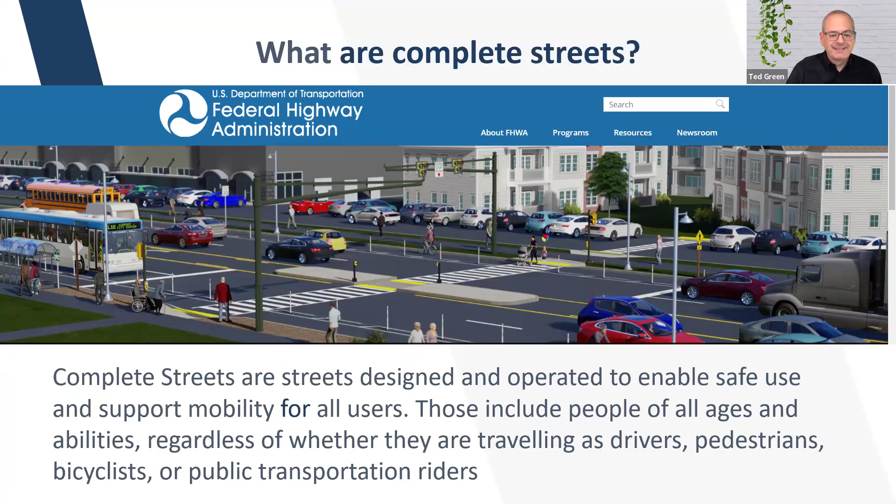Heavy traffic though. So what do we always hear about when it comes to complete streets or even about having pedestrian networks as a whole? Well, the biggest thing we have is: we have no pedestrians. Well, that may not always be the case, but if you have a situation like this where you see these little pathways along the side of the road, you may not always see pedestrians, but that pathway gives a clear indication you do have pedestrians.

So people say we don't need sidewalks because nobody walks here, but this gives an indication that you do have a need for pedestrian networks and even possibly bicycle networks. Probably, if you have pedestrians, and especially over long distances, you can also have bicyclists as well.

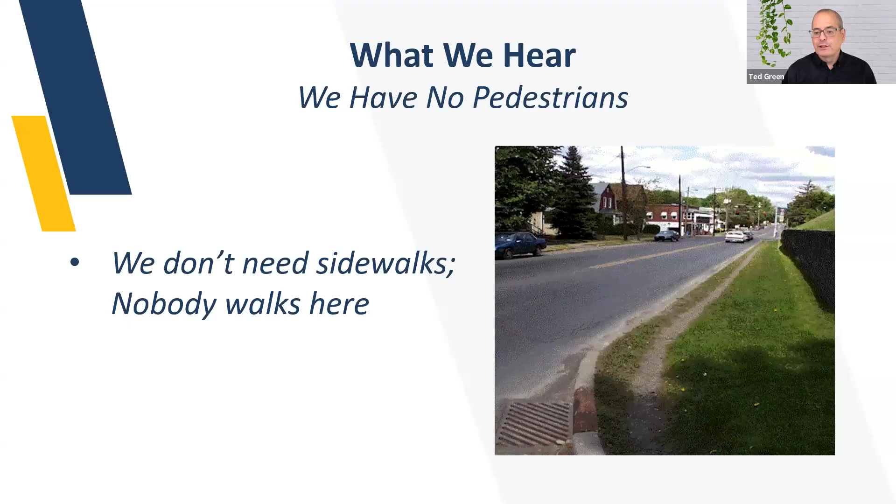The other thing we hear is this: I would walk here if there were sidewalks. Ever been in that type of situation? There are some roads where you really don't need sidewalks. I grew up on one of those streets. I mean, there was not enough traffic. It was low speed. We actually played in the street, no problem. We also knew to get out of the street if a car came.

But that always becomes a thing. Some people would walk if they can do it. And I've definitely seen places where people are walking and it's kind of frightening that they are walking, but it's the only way they can get groceries. And even a long walk that they have to do when they have to go shopping or some other place. There are just people who don't have a driver's license, don't have the ability to drive anymore.

Lots of different reasons. Can't afford a car. Cars are expensive to have, not just to buy, but you have to insure them. You also have to pay for maintenance.

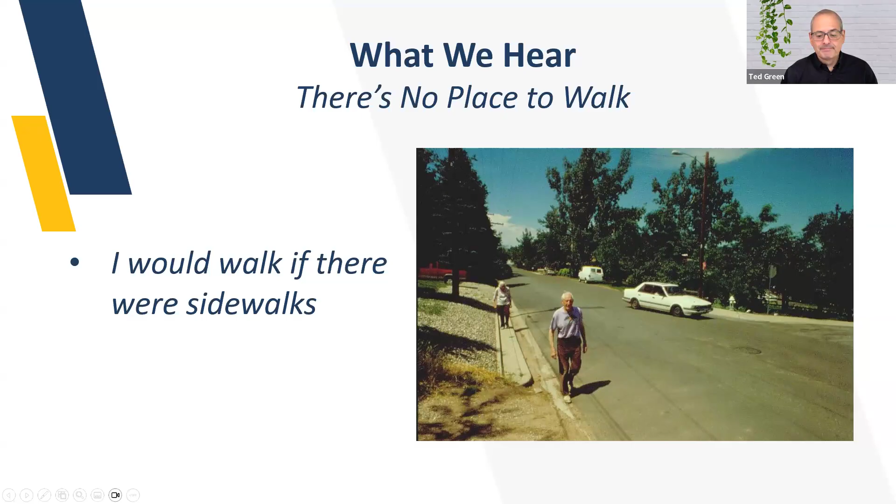So here's a question. I don't have the chat box, so I can't use this one. But just think for a moment, and I'll bring up the answers that always pop up. They can put them in the Q&A if you want. Okay, if you put it in the Q&A, it's perfect. Just put the first thing that pops into your mind when you hear the word disability. You place that as a question.

There is slightly more variety than usual, but the big thing that pops up is wheelchair or curb ramps, since they're intertwined together. And that is a big thing when you say the word disability. Most people, especially engineers, that's how I can tell who the engineers are, say wheelchair, because that's what we see the most often. We see a lot of people with wheelchairs. We put a lot of emphasis on creating curb ramps for people in wheelchairs.

But it's far more than just people in wheelchairs that have a need for accessibility. Can't do something. That's an interesting one. But mobility as a whole becomes a big issue. Most people, like I say, think of wheelchairs, but wheelchairs aren't the biggest group of people out there. Somebody just put blind. That's actually a good one.

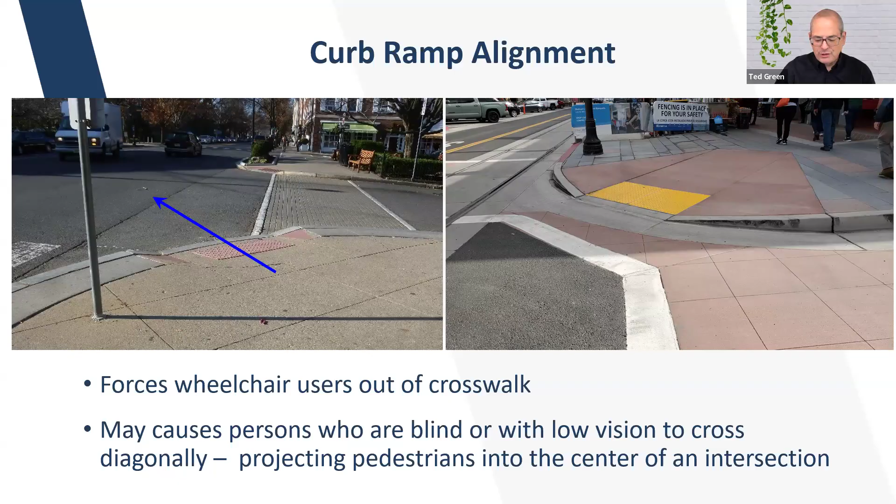Alignment. So this is what we like to have: a nice straight alignment. You can see in the photo on the left, straight across on both of those particular crosswalks into their crossings. So we see that other diagram. We have good separation. That's a complete streets type diagram. We have good separation of everybody. We have travel lanes.

We have curb extensions, or some people call them bulb outs, which actually give you shorter crossings for pedestrians by bumping it out. It also keeps parked cars away from the crosswalks, which helps with visibility, and you don't have anybody parking in your crosswalk. So a lot of good advantages to that. And we see bus stops. Nice, good setup, and all the curb ramps line up with the crosswalks.

So you see how it's all set up with that one diagram. You see the one crosswalk in yellow. You see that at the bottom there's what's called a clear space. It's actually fully in the crosswalk. So it's just a nice setup when you see items like this. And there are no conflicts between the pedestrians and motor vehicles going in the same direction.

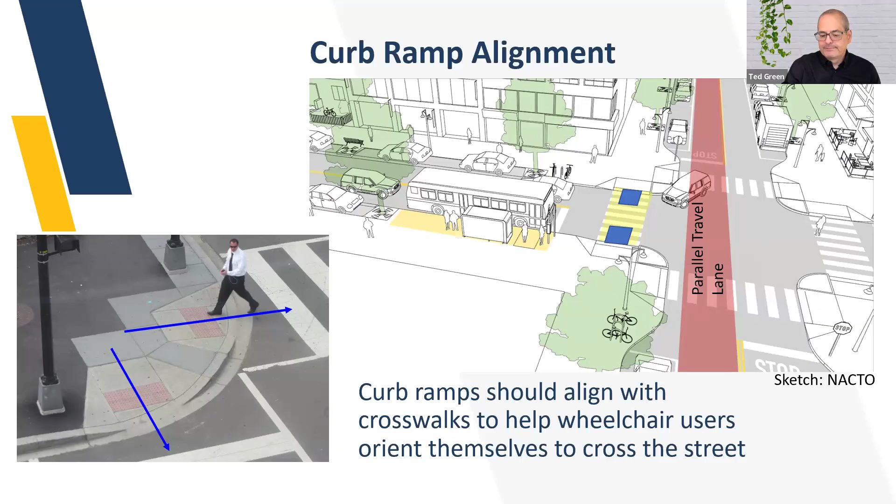Decorative crosswalks. This has definitely been in the news lately. It's also in the Manual on Uniform Traffic Control Devices. A lot of people aren't aware of that. If you have a marked crosswalk, the two white lines are the minimum. So anything between those is part of the actual traffic control device itself. Specifically, we're talking about the traffic control device of a marked crosswalk.

Now, a lot of times people use this for beautification. There can be some issues with this. The biggest issue is with pedestrians who have low vision. People with low vision have very blurry vision, even if they're fully corrected. They can't see our nice, pretty patterns out there. To them, it looks rather confusing, so they don't know if it's a crosswalk or not.

And also, it's a bit of a psychological item. They might see some blurry pattern. They don't know if it's a smooth surface or a textured surface, and this can actually lead to them tripping. So there have definitely been some problems with these.

Also, it's a big problem for people who have to use walkers and crutches, because a lot of people are using regular paint. It's not traffic paint. So when that paint gets wet, it gets extremely slippery. So people are slipping and they are suing people for doing this. There have definitely been a lot of lawsuits throughout the country from people having slips.

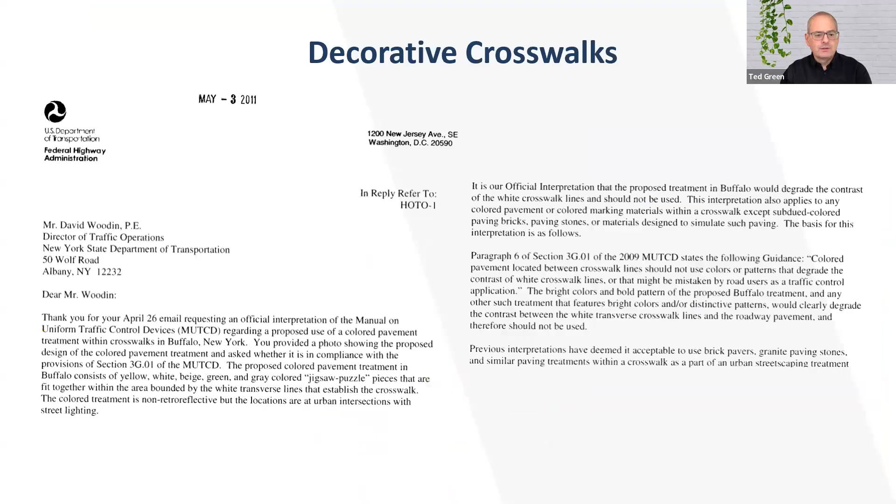I think the question was, where is the actual crossing in that upper right photo? The actual crossing is Pine Street in Seattle. No, where would you actually walk here as a crossing? If you can't see my arrow, I can use the laser pointer. Can you see the laser pointer? Yep, we can see that. This is the crossing right here.

So a few things you can see here. You can see a return curb here and a return curb here, and a pedestrian signal here and a pedestrian signal here. So this whole width across is a crosswalk. The reason it's so wide is you can actually drive vehicles on it. That's why it's confusing: this zigzag pattern, these diagonal lines. There's a diagonal line here, and at the intersection it goes diagonally across, so it looks like a crosswalk line when it's not. Okay, thank you. Yep.

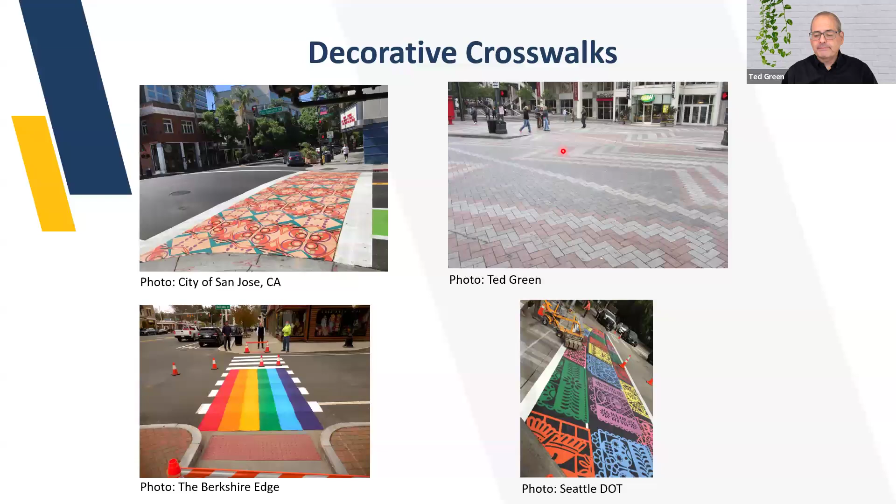So, oh yeah, Boston had one. They found out where I was staying, and it's like, oh, you're going to drive over the crosswalk. They were really proud of some pattern that they have. They said it's so nice, you can't miss it. I drove over that crosswalk 3 times. I missed it. That's a good thing. So as a motorist, it was not a distraction to me.

There definitely are cases where people, and I've actually witnessed this myself, people will stand in the middle of a crosswalk and take selfies. They need their Instagram on this nice, colorful crosswalk. So pedestrians have been hit by cars because of it. Pedestrians will sue. They will sue the city on what's called an attractive nuisance. They created something that was an attraction that becomes a nuisance for everybody. So that becomes definitely a problem when that happens. So there are definitely reasons.

Also, you may have heard in the news that the Federal Highway Administration, the U.S. Department of Transportation, is cracking down on street art as a whole because it is a violation. It's actually costing people their federal funds. But at the same time, some people have actually marked crosswalks properly. They went vigilante and did it.

This is actually happening out in Los Angeles this past week. Some people got upset that they did a complete streets initiative and did not put in crosswalk lines. And they did this complete streets initiative to make it safer for pedestrians. I actually know somebody who lives right next to this intersection. I mean, they're at the corner. But they never marked out the crosswalks. So people went out with house paint, which, I guess it can work somewhat in Los Angeles because it doesn't rain all too much. But that becomes a problem.

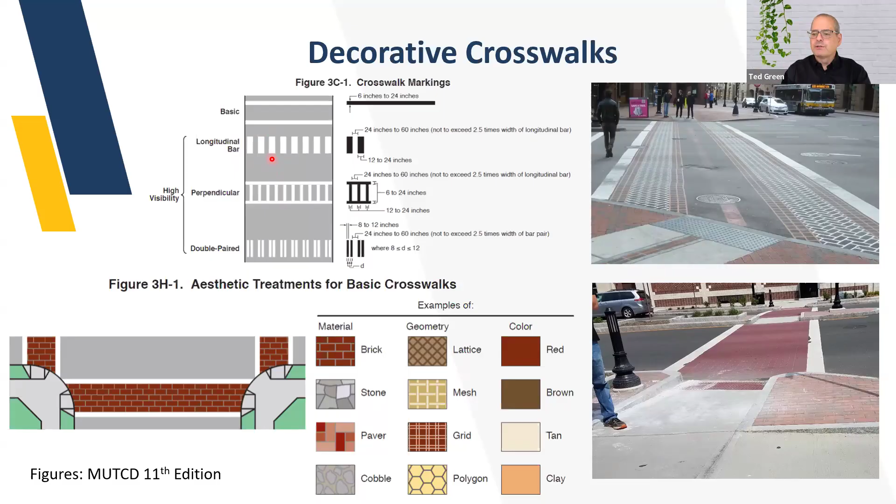Now, I don't expect it in the near future, but they were going to have an option in the future. So I would say maybe 6 years from now, we might have the option with the longitudinal bars that each bar might be a different color. They might permit that in the distant future now. Normally, I would have expected that in about 2 or 3 years from now. I'm sure that's delayed for at least 6.

MUTCD is supposed to come on a 4-year cycle. Curb extensions, painted ones in particular. Now, curb extensions are a great thing people use during complete streets. It helps move parked cars away from the intersection. It creates nice short crossing points for pedestrians to cross the street because, in theory, a pedestrian can stand here and just walk across. So, in a case like this, might be about 6, 8 feet less crossing. So it's a lot easier to cross the street.

Also, if they did know that there was a painted curb extension here, they wouldn't know where the edge is. So they wouldn't know where to stop. Also, they can't detect edges of paint. They can't detect the bollards. And this freaks people out sometimes, even if you have something like bollards.

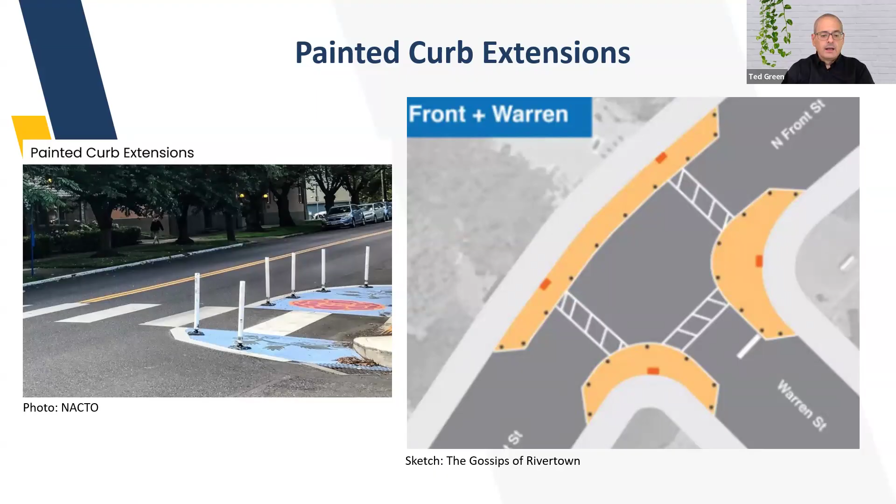Painted curb extension. So ideally, we have physical curbs is what we like to have out there. Actually, if you look in any design book, it will say use a physical curb. The Americans with Disabilities Act will also mention using physical curbs as well, so it's detectable. Like I said, a lot of people use the painted islands temporarily to see if it's usable. There might be some way to do that.

I got a question. Are there any guidelines on how detectable warnings should be replaced? They tend to fade away quickly. I'm assuming you're talking about the bumps, as in truncated domes. If you're talking about fading, because some people might use red, and the problem with a red detectable warning surface... where is it? I got one in another room. It's packed away for a trip next week.

Truncated dome. If they're talking about the bumps themselves fading away, it might be the material. If you're using something like masonry brick, that will wear away very quickly. Masonry brick generally does not do well, especially if you have snow removal equipment, including a snow shovel.

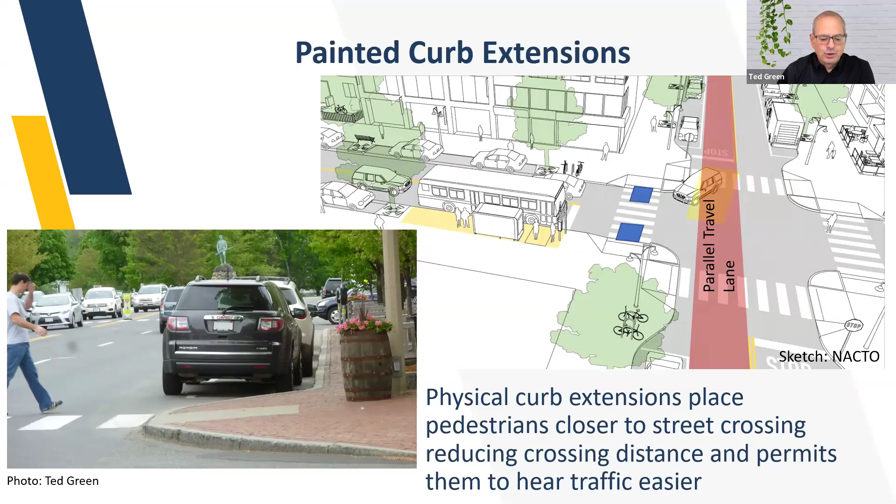Islands can be a different issue for many people. We also use a lot of islands. The advantage of an island in the middle of the road is that it can provide a refuge for pedestrians. So a lot of places are using this in complete streets. You do have to be careful about the placement of these islands in complete streets. Now, the advantage of this, it gives pedestrians, they can go one direction, have a refuge in the middle, and then do the next one. So they don't have to have both directions clear at the same time. They can go in steps.

There have been some issues in some cities that if you have these anywhere near an ambulance response or any emergency response route, it can prevent the ability for the emergency vehicles to get through. How does that happen? Well, if this island wasn't here, just say if a fire truck was coming down the street, cars would hopefully move off to the sides and then they can drive down the middle. Well, in this case, we've lost that maneuver. Also, sometimes these islands might be too close to an intersection, so a fire truck can't actually make the turn. So you can see how that can be a bit of a challenge.

Maybe with a mountable curb on the end, it might be able to work. So there are things you have to take into account. Just be careful with these islands, especially if emergency equipment routes in certain areas, or if you're near a hospital, it can prevent the equipment from getting through if it's at the wrong spot.

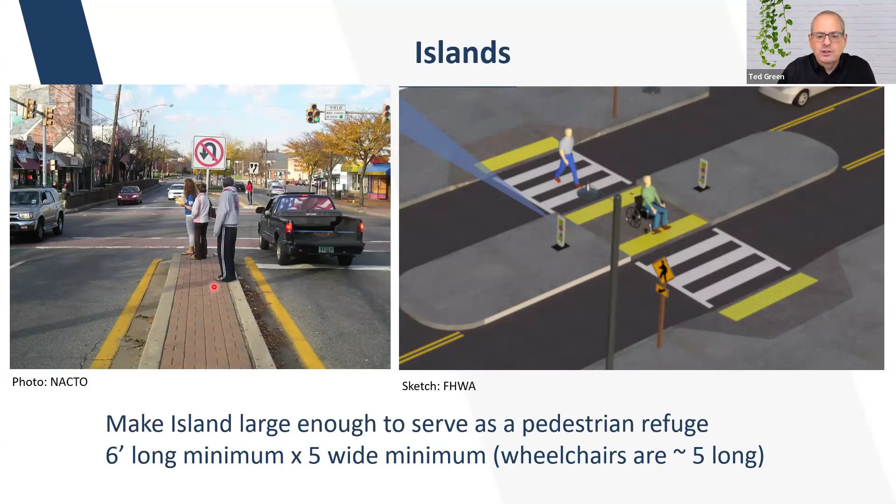And you need an opening at least 5 feet wide. A lot of people go with 6 feet because most marked crosswalks are 6 feet. So you're just taking out a bottleneck. Just one of those nice little things, just make your cut through on the island the same width as your crosswalk, it does help quite a lot. Unless it's a really wide crosswalk, that's a different story. And it's always important that you place detectable warnings at each curb.

But also, if you have an island that's at least 6 feet, so 6 feet this way, you need to have a detectable surface here and a detectable surface here with at least 2 feet between them. This is just so that a person that's particularly blind, so this is what's called the curb ramp conundrum.

We put curb ramps in for people that are in wheelchairs or other mobility issues, but somebody that's blind actually can detect a curb. And when we make it a gradual slope, we remove that detectable surface. So we put these detectable warnings or truncated domes here so they can detect the edge. When they get across here, they hit this one, they now know they're about to step into the refuge. This clear spot. They hit this next one, tells them that they're about to cross into traffic again, and then this one tells them they're out of traffic.

Now, if you're less than 6 feet, this gap becomes less than 2 feet. That's not detectable. And the one thing you don't want to do is put just one detectable warning surface there because somebody comes out here and they might stop, and they might stop in traffic. That's the one thing we don't want to do is have pedestrians stopped in traffic.

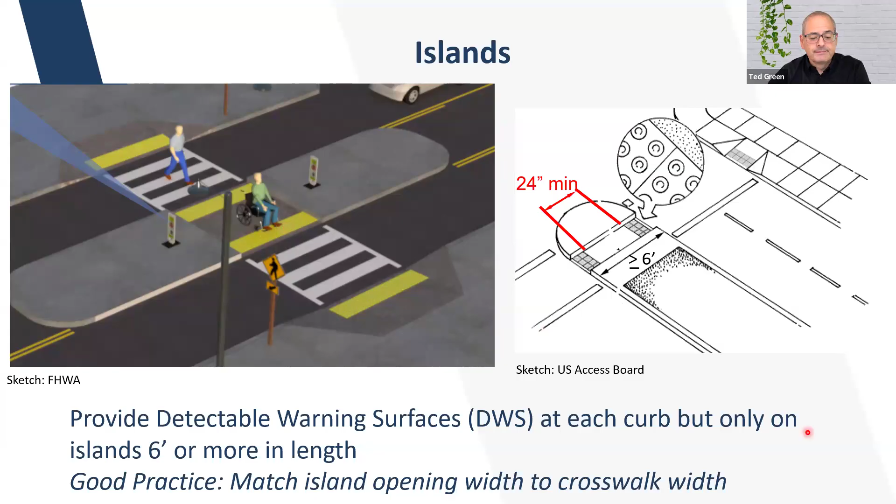This becomes definitely an issue for many places and when we're doing complete streets. Bike lanes are a key component of complete streets initiatives, but this can become a challenge for people that are blind or low vision. Also, a lot of this I know upsets a few people in the bicycle community. I ride a bicycle, and bike lanes are a great thing to have in these urban environments. But a lot of bicyclists, especially if it's in a more touristy area, don't follow the rules of the road, in particular stop signs, and that becomes a big, big issue.

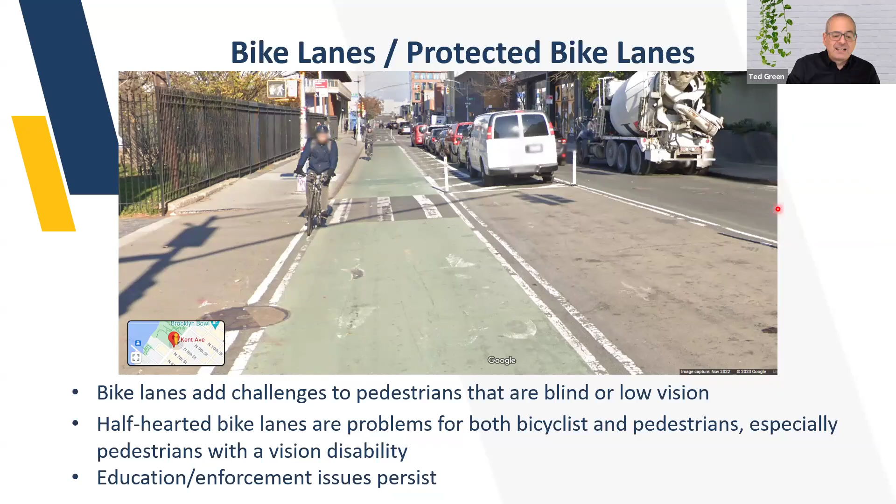Tillary Street and Adams Street is definitely a big issue of that happening. Yeah, they've definitely got a place where that happens, quite a few conflicts. So there are a lot of conflicts. That's why they say half-hearted bike lanes. Here's one that looks almost perfect. This might be near where you're talking about.

This is in Brooklyn. Here we have good separation between cars and bicyclists. Here, the bicyclists have a protected bike lane. It's separated from the vehicle traffic. Pedestrians are separated. They're over here. So we have this beautiful separation between pedestrians, bicyclists, and motor vehicles. So it's a wonderful thing.

But there's a conflict. So this is why we say there can be conflicts between complete streets and ADA. Now, for a pedestrian to use this crosswalk here, they're over here. First of all, it is going to be difficult for them to find it, but where are they going to wait? Especially somebody in a wheelchair. They're going to be waiting here in the middle of the bike lane, even though it says yield. So the bicycle is supposed to yield.

So they did that. But there's going to be a conflict when a pedestrian, especially a pedestrian in a wheelchair, comes out here and they're going to be stopped in the bike lane. That can be an issue. Also, a blind person, they can't really find it. They'll probably stand with a cane touching this surface and they might still be in that lane. So it becomes an issue. Or if you have a lot of pedestrians crossing, guess what? They're going to be clogging up this whole area.

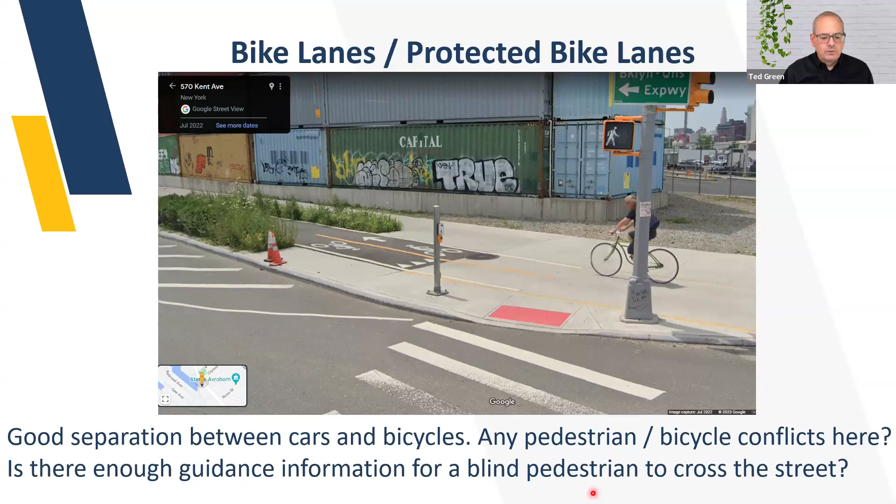But yeah, the official law is that bicycles have to yield to pedestrians and stop for pedestrians, but not everybody does it. I've seen that in a few places where you see like 5-foot stop signs on both sides of the bike paths because there's heavy pedestrian crossing and the bicyclists don't stop. Well, I would say in almost every state law, bikes are considered a vehicle. I think it is every state that considers them a vehicle and they have to follow the vehicle rules.

Shared streets. These are also a common thing people are using for complete streets. Shared streets are essentially a street that's got a very, very low volume of vehicles. But vehicles, pedestrians, and bicyclists all share the same space in the street, and there are no curbs present. There is an actual document by Federal Highways out there, accessible shared streets, that you can look up. It just talks about how people manage these things.

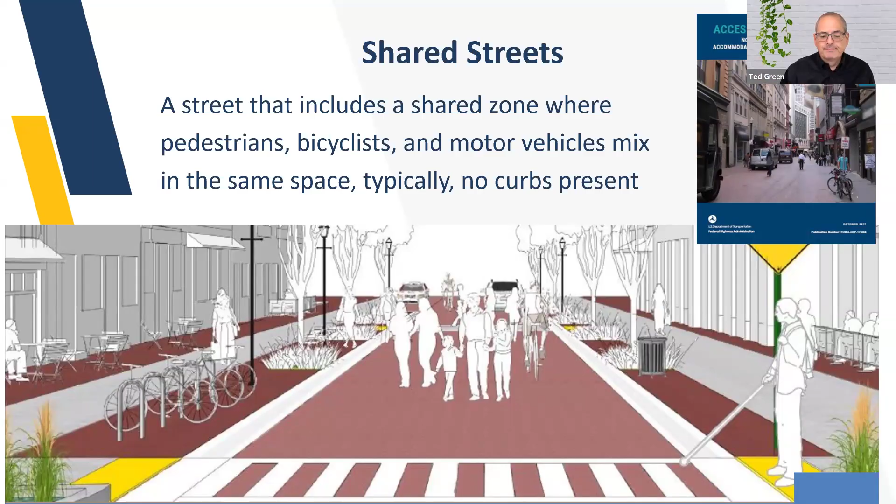So this can become a bit tricky for blind individuals. If they needed to get out of the way, it can become an issue. If a car is coming, they don't know actually where there's a safe spot. So here we have the shared street. We also have dedicated sidewalks that pedestrians only can use. Looks nice, but you just have to make sure it is accessible.

Things you can do. Since we don't have curbs, one thing you can use is unofficially used, but it's kind of one of those wink, wink, nod, nod type things. There is the ISO 23599. You can use this tactile strip like this. Do not use truncated domes. So this becomes a detectable edge. Truncated domes are specifically on curb ramps at crosswalks. So detectable warnings are specifically at the bottom of curb ramps or blended transitions at crosswalks.

Now, this other surface technically hasn't been tested in the US. They're extremely common in Europe and in Asia. It's not lost on me, though, if you go to US Access Board's website and the PROWAG page, they are showing this. So it's not lost on me, that particular item. But this does provide a good ability to create a trackable surface so somebody can actually follow it and it becomes a longitudinal surface. Other things you can do is have changes in slopes like this, but you just have to be careful. It can become a bit of a tripping hazard

when you have these traversable, slightly traversable curbs. I know one place they wish they had not put mountable curbs, and that's at the Meadowlands Stadium, where the Jets and Giants play, because they put them all over the place and pedestrians are crossing them and it's not easy to walk on, and they're painted bright yellow for that reason because people keep tripping over it. Vertical curbs would have worked much better in that case. Parts that got rebuilt when they put the train station in have vertical curbs.

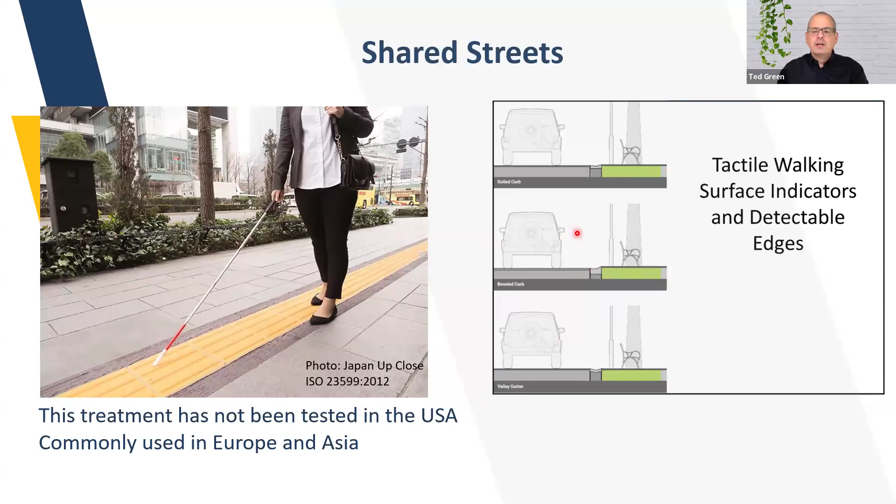But these are ways, or even a change in surface material. So these might be smooth concrete. This could have been something more textured that can provide some way of making it detectable.

Pedestrian signals. Accessible pedestrian signals can be a great thing. This information here is actually based on a lawsuit that was against New York City Department of Transportation, which they were the losing end of this one. But one of the things that came up was what's called leading pedestrian interval or exclusive pedestrian phase, so LPI and EPP. So these were problematic without accessible pedestrian signals.

So these are great things for moving pedestrians, but they don't work well without APSs, definitely with blind and low vision. And actually they help when you have sighted pedestrians, APSs in this situation. So on LPI, what it means is that the pedestrians have the opportunity to enter the crosswalk 3 to 7 seconds before the vehicles are given the green indication. So at this point, if you see the pedestrian signal go to walk, you can walk. Cars aren't moving. You don't have to worry about turning movements. So it has that advantage.

But then what becomes the issue is a blind person doesn't know that change to walk. So they're losing the advantage of it. They're getting a shorter walk cycle for it. Also, what happens with LPIs, I've seen this happen quite a lot. What happens with pedestrians, the light's sitting there and says don't walk, too much traffic. And then they start doing things like this or talking to their neighbors. And that light silently goes to walk. They don't see it. But the accessible pedestrian signal, if it makes a noise for the walk indication, they immediately wake up and walk. So they can actually move about 10% more pedestrians with an APS that's operating in that situation.

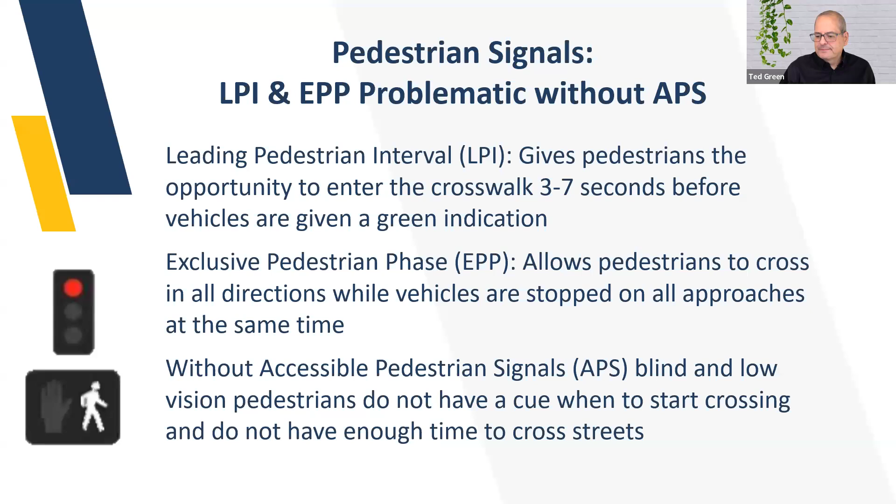This is what came up. This was actually from the lawsuit against New York City Department of Transportation. So here's just what it said in the language specifically.

In addition to the risk that exists in general for persons crossing city streets without visual cues, initiatives to specifically configure certain New York City intersections and make them safer for sighted pedestrians to cross have had the unintended effect of increasing confusion and danger for the blind. Problematic configurations include the LPI and the EPP, and more complex geometries, including as a result of medians and bike lanes that have been installed in recent years. So quite a few things came up in that particular lawsuit against the city DOT.

City DOT knew this. They worked a lot to get ahead of this particular lawsuit. So they worked ahead. The only thing they didn't like was the timeline. Their numbers are astronomical. They probably have more traffic signals than the rest of the state combined. I mean, with pedestrian signals.

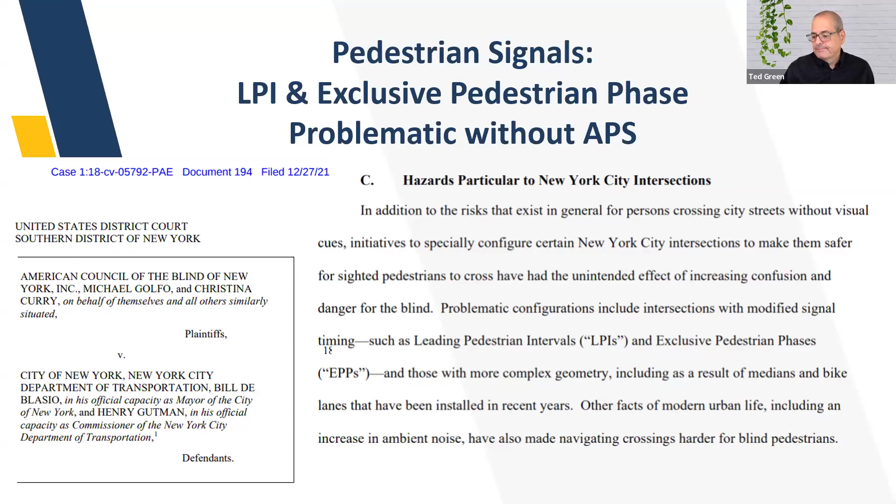So APSs, they provide a lot of useful information, audible and vibratory tactile cues. So you can hear them. They vibrate for walk. If you put your hand on them, they have an arrow that also tells you where they are, but they need to be placed close to the crossing point so that they are usable by any pedestrian. So sometimes these get lost, especially, as somebody mentioned in the question, when we have curb extensions, they get forgotten about because you don't want to move the poles. But they get moved, so now they're too far away to be useful for any pedestrian.